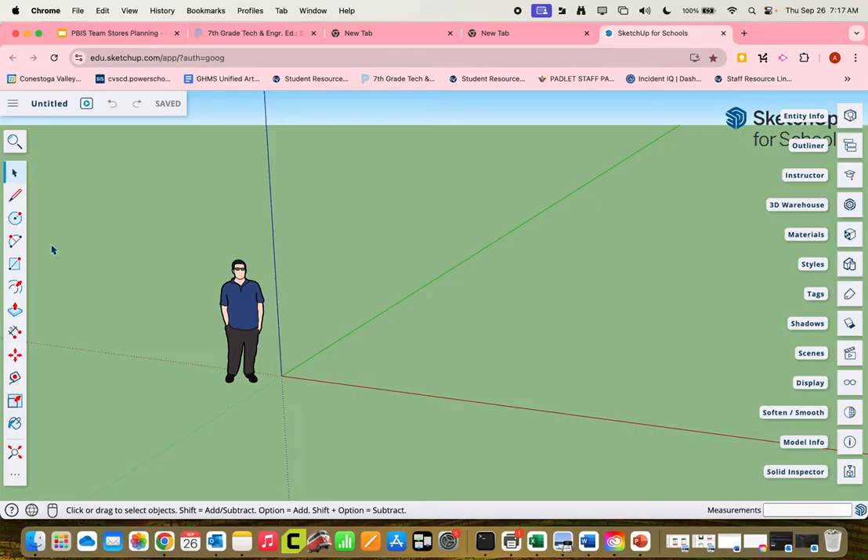And our first assignment, which is the step block, is very small. It's smaller than someone's foot. It's just a little block of wood that's about 120 millimeters long. So I'm going to start here on the ground, and I'm going to use my rectangle tool. I'm going to click right on the origin. I'm not going to hold the button down. I just click to start it, and you'll notice that as I'm doing this, these numbers change because it's live

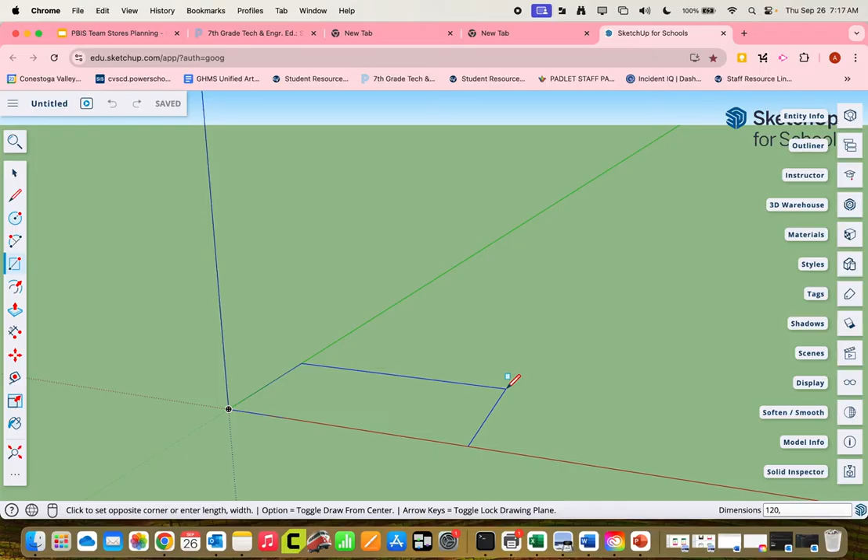as we speak. So I'm going to let go of the mouse, and I'm going to type with my right hand so I don't bump the mouse. I'm going to type in the dimensions, which is 120 by 44. I'm going to hit enter. So this should be 120 by 44.

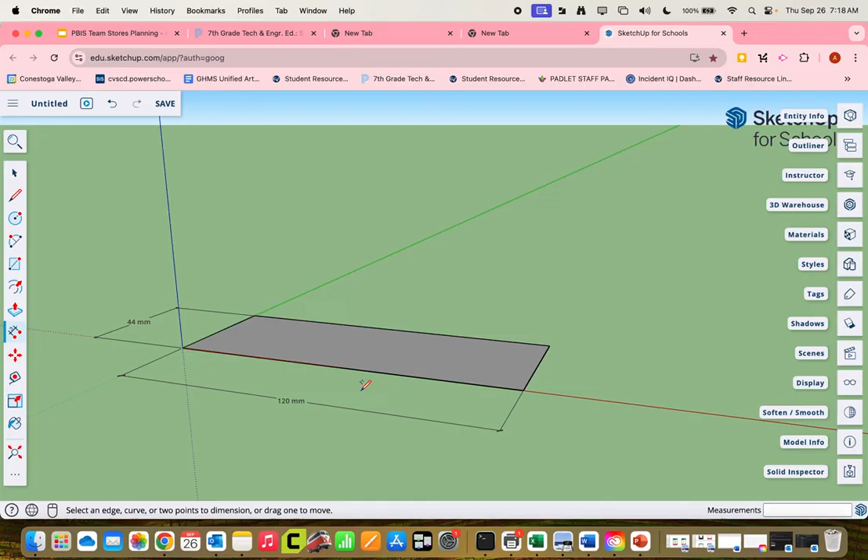To double check that, we're going to use our dimension tool. Here's the dimension tool. And if you do not put dimensions on it, then it will not be correct because I won't know when I go to grade it if it's right. So here it tells us it's 120 by 44. So now we know the base of this thing is correct.

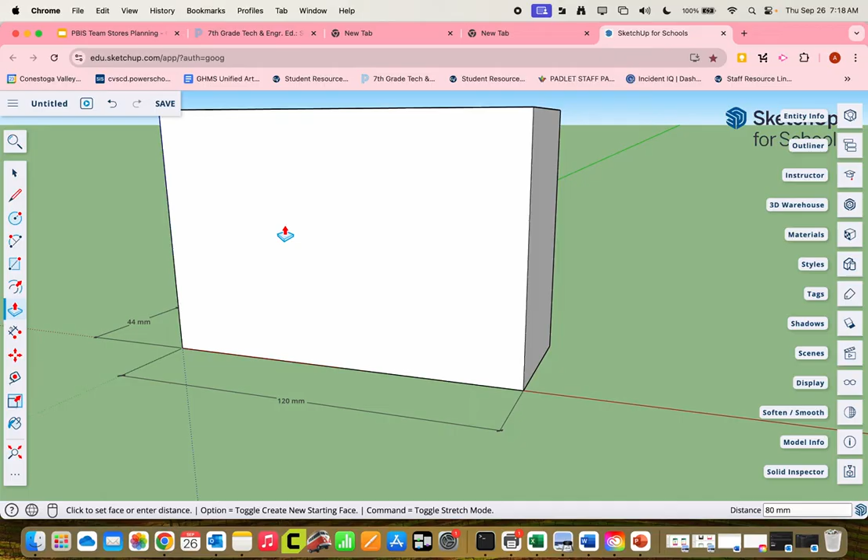I'm now going to use the push-pull tool, and I'm going to select it. Again, do not hold the button down, and I'm going to lift it up. You'll notice that as I'm lifting it up, the numbers are changing over here. So I'm just going to lift it up a little bit so it knows which direction I want it to go. I could specify down or up. I want it to go up, and now I'm going to type in the overall height of the step, which is 80 millimeters. Hit the enter button, and there we go. I've got the beginning of this block.

I now need to separate the first step from the top step. To do that, I'm going to take my tape measure tool, and I'm going to measure from this side 60. Now to do the tape measure tool, it's better if you avoid the midpoint. Just click on the line itself. Again, don't hold the mouse down. And this allows you to drag out. And I'm going to type in the number I want that to be. I want it to be 60.

Oh, that didn't work. I'm going to undo that. Control Z. Let me try that again. That's because I used the dimension tool. My mistake. I need to use the tape measure tool. The tape measure tool, there we go. So I'm going to drag this tape out, and I'm going to type in the number 60 and hit enter. And there we've put a guideline.

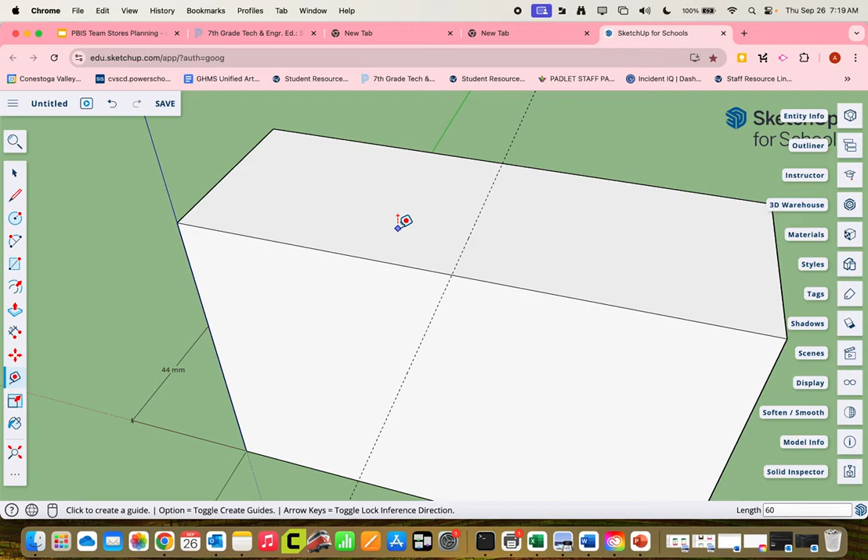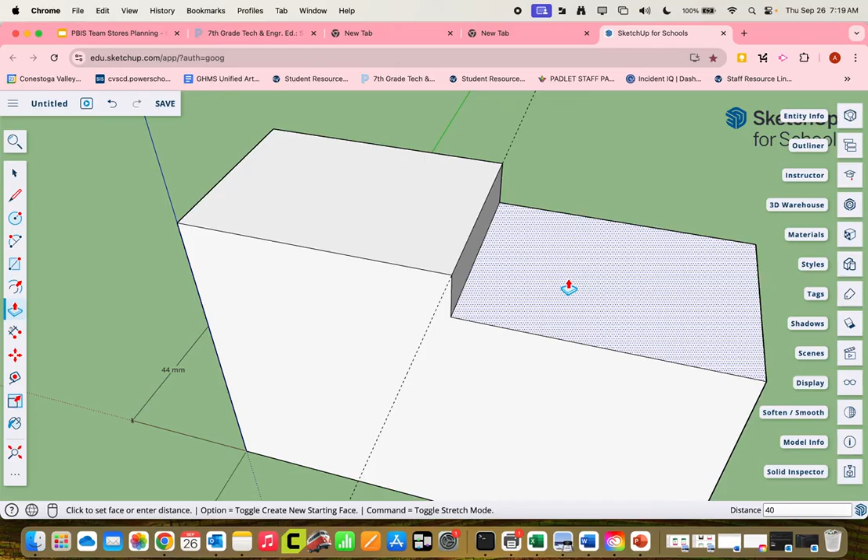Now you'll notice if I try to use the push-pull tool, it doesn't work. I need to undo that because I have to actually draw a line. Now that I have a line, these two boxes are separate. And I can lower this one 40 millimeters like that. So there we have the first block.

Now I'm going to take my eraser tool, and let's see here. Where is the eraser tool? It's hiding in here somewhere. And I'm feeling the pressure of being videotaped. I don't know where it is. Oh, there it is. And I'm going to erase this guideline just so it looks a little bit better.

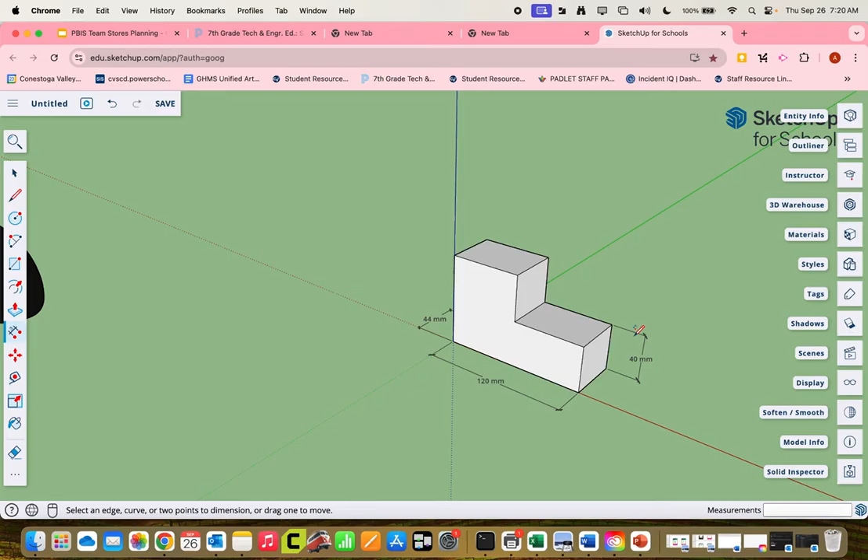And I'm going to go back to my dimension tool, and I'm going to add the rest of the dimensions that are on the assignment or on the board in my class as we speak today, but of course it won't always be there. So I need the 60 up top. I need the 44 back here. I do not need this 44 down here and this one. It's the same thing. So you can pick either one. I'm just going to delete that one.

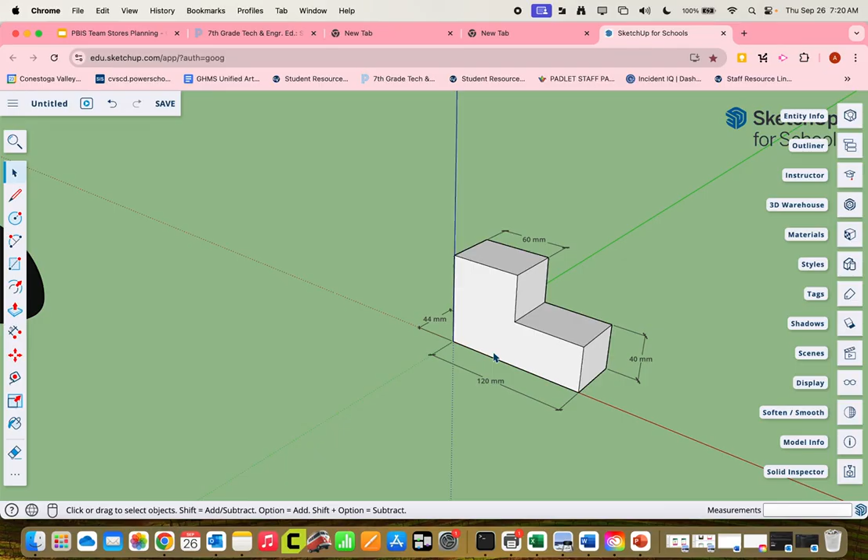So I've got the length, I've got the width, I've got the height of this part, but what I don't have is the height of the entire thing. So I need to put this dimension on this line as well. So there we go. We've got length, we've got width, we've got height, we've got the length of this step and the height of that step. This is exactly what you need for assignment number 1. This is what you would take a picture of, and this is what you would submit for assignment number 1.